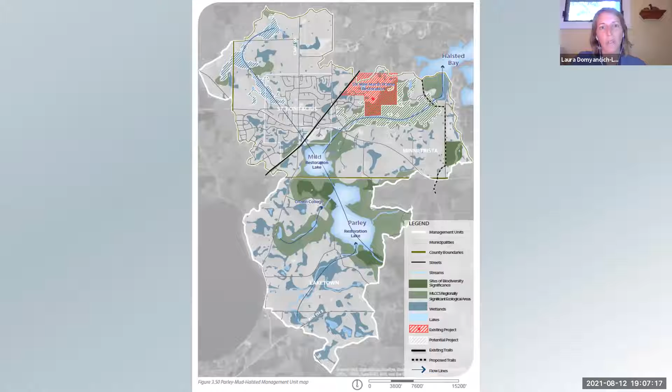This evening, I'd like to cover an overview of the project and the priorities that have been guiding design up to this point, and a summary of input that staff received from the Policy and Planning Committee meeting in January that's informed certain design decisions.

Some feedback that staff received during a community engagement event held earlier this month, and also from Minnetrista City Council when staff provided an overview of the project in August, and also what we've learned from our coordination with our project partners, how design development has progressed for both the trail and the site interpretation.

I'll also ask for the board's reaction to the design direction up to this point, and provide an expected timeline for us to reach design completion and then also for construction bidding.

Just a little bit of background on this project. The original Capital project itself dates back to 2012, when the district purchased 210 acres that were formerly 2 farmsteads. The wetlands on the site had been tiled and drained and were being farmed along with most of the uplands of the site, except for a few pockets of oak woodlands.

The intent of the original capital project was to restore the property by breaking the existing drain tile, which allowed the wetlands to expand to their historic extent. After 3 years of intensive vegetation management, including seeding and herbicide application, mowing, and prescribed burning, this led to an establishment of a really diverse native plant community that's provided both water quality improvements and habitat improvements.

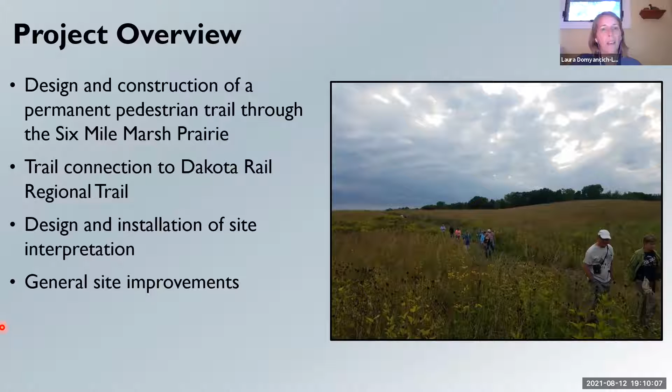Following early design guidance provided by the Policy and Planning Committee meeting in January, staff have been guiding design development under some primary considerations.

The natural character of the site, its sweeping views, the diversity in plant life, and the array of wildlife is really highly valued by the community. And these resources are sensitive to disturbance, which should indicate that we would use a light touch on the site, not only in construction activities to construct the trail, but also in the scope and scale of the project itself.

Also, through maintenance of a temporary mowed trail that's covered the western half of the site, we've seen consistent but really light usership, which indicates to staff that the design of the trail and interpretive elements should capitalize on both the regional trail users and also people who will come to see the site as a destination over time, accessing the property from Halstead Drive.

There's only about 750 people within a 15-minute walk shed of the property, but we know from Three Rivers Park District that between 350,000 and 400,000 people use the regional trail annually. So there's potential for greater visitation once people are aware of the site. Also, because the property is so unique in this rapidly developing landscape, people may begin to seek it out as a destination for birding or viewing wildlife.

In thinking about how to best interpret the site, our guiding principles have been that interpretation should create a meaningful engagement with a landscape that some people can feel overwhelmed by or unfamiliar with, while also noting the intricate, observable features within this expansive landscape. Interpretation should reflect the unique characteristics of the site, underpinned by water, matching the high design standards set at Wasserman Lake Preserve, but customized to this unique site. The scope of interpretation shouldn't overpower the beautiful rustic character of the site, but complement it and cause people to connect with it.

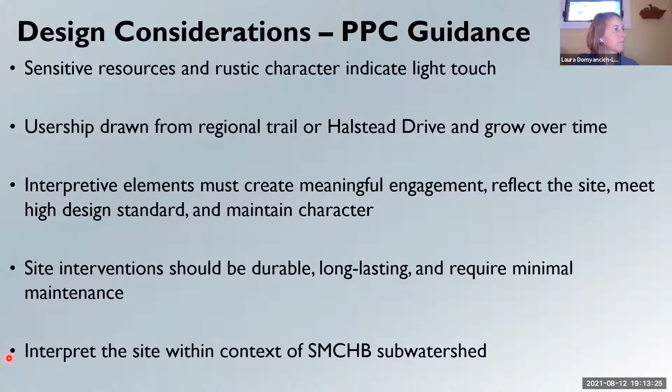Interestingly, we heard a lot of these same themes during a community engagement meeting held on July 6th. The community expressed a strong interest in design that would limit disturbance to the site during construction, and advocated for limited interventions to protect the sensitive resources on the site. The questions raised were primarily about the scope of the project and the anticipated timeline, and people were also interested in potential connections to future regional trail extensions to the east.

I will say that the goal of this project is to provide access to our site, to the prairie from the regional trail, and not really to serve as a connection to the future connections planned to the east of the site.

We also presented a design overview to the city council on August 2nd. Council expressed excitement about this new resource for their city and asked questions about possible connections to the Turtle Creek neighborhood to the south of the prairie.

Possible connections were explored when we undertook design in 2012, but those options were set aside because there is an existing sidewalk that connects to the regional trail from this neighborhood. Site topography between this neighborhood and the prairie itself is pretty dramatic, and it doesn't allow for trail alignment without significant grading.

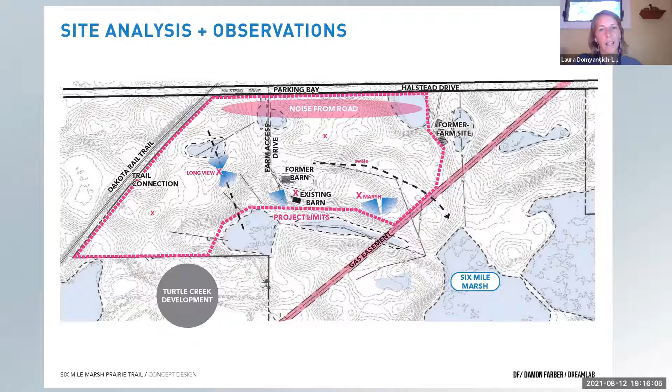Focusing that broad direction, Damon Farber has proposed a trail design that considers a meaningful experience of the site, as well as safety and long-term maintenance.

The alignment and surfacing of the trail itself promotes low-impact pedestrian use. It should encourage a slow pace through a variety of habitats within the site, follow an optimal length loop, allow for accessibility, and reduce site disturbance, providing for minimal long-term maintenance and associated costs.

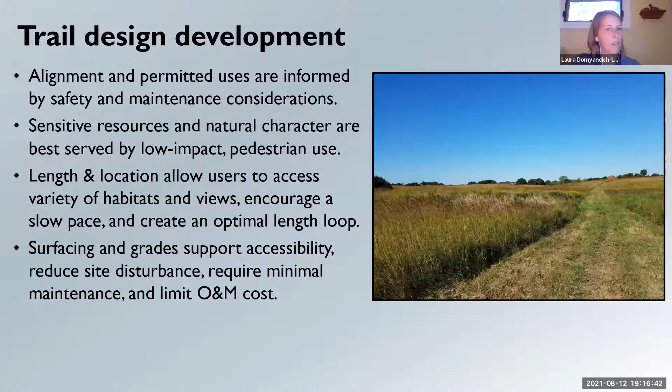So the result of incorporating all of these considerations is the trail alignment shown here in brown. The new trail will connect to the Dakota Rail Regional Trail on the western side of the site, indicated by the red circle here.

The first 25-foot section within the tree line on the Hennepin County Regional Rail Authority property will be built to typical regional trail standards, that's 10-foot width and bituminous surface. Once the trail moves into the open prairie, we'll taper it to a 6-foot width and transition to a decomposed granite aggregate surface.

As you move along the trail from west to east, you get to a high point right about here. This allows users to enter the site through this beautiful valley, and then you get the sense that you're enveloped by the prairie, with a gentle rise to this high point that allows a beautiful long view south towards 6 Mile Marsh.

Then the trail crosses the existing access road and brings users to the historic barn on the site, which is a really natural gathering space. From that point, users can either traverse the same alignment towards 6 Mile Marsh and the eastern extent of the trail alignment, looping around between these two beautiful wetlands on the site.

Then they can return back to the historic barn or follow the loop the other direction, and then either go out back towards Halstead Drive, the trailhead location and parking that's there, or continue on the existing spur trail back out to the regional trail.

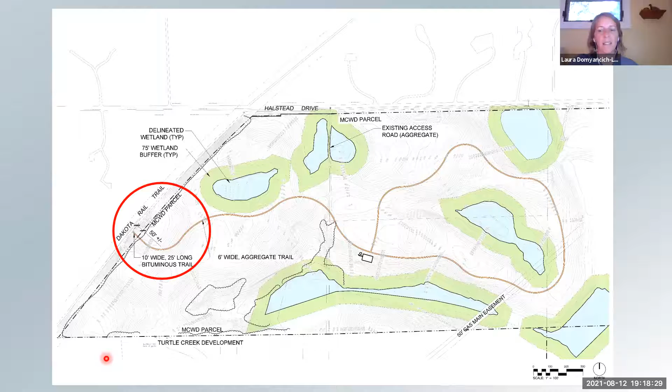Turning to the themes behind design development next, we really think that the naturalized site is beautiful on its own in its existing state, but is really defined by the space and scale of the property and that unique rustic character.

We also think that the range of stories to tell is really broad. It's had a long history, with a number of different uses over time, and there's a really cool history to tell within the site. We also think the interpretation should be consistent with the standard set at Wasserman, but also specific to this very unique site.

And then also, we want to make sure that we're finding the right balance between thoughtful interpretation without altering the natural character of the site.

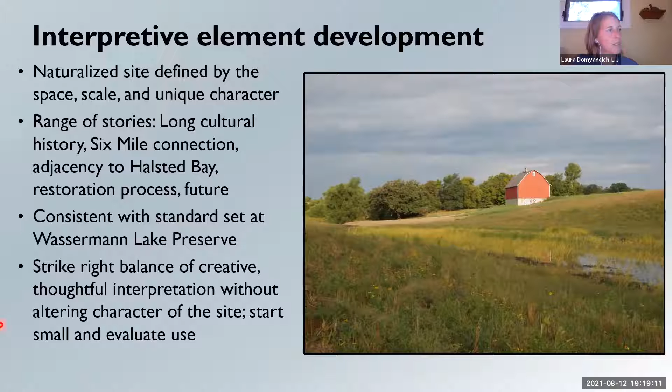Design decisions were guided by the goals of providing multiple ways of engagement, whether a user is coming to the site one time or multiple times over the course of the year, with many layers of engagement by encouraging exploration through different types of content you can experience with a casual visit or as someone more interested in learning about the site.

We're also making sure that we're creating interpretation that's relevant to the changing seasons. We expect that people will visit the site through spring, summer, fall, and then even use the site in the winter as well.

The first interpretive area along the trail will be this ecological transect at this high point of the prairie. The trail will then bring users to the barn, which will be another interpretive area. The third and final location is this long view over 6 Mile Marsh.

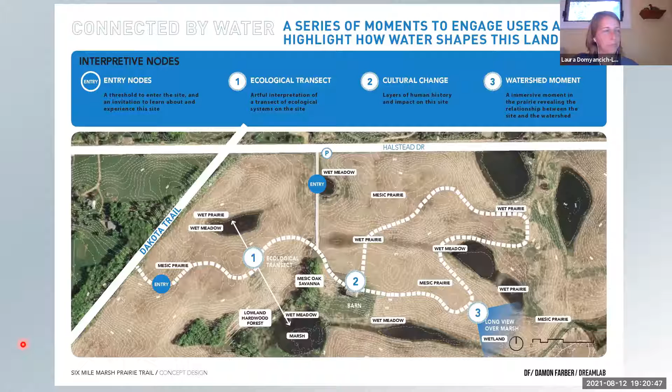The first piece I'd like to share is about the trailheads. The information shared at these trailhead locations will be primarily informational in nature - a bit about the site, that people are entering property of the watershed district, information about the restoration of the site, how it connects to the larger 6 Mile Creek Halsted Bay watershed, and a simple trail map showing people where they are and what they can expect as they experience the trail.

Those will be at both the regional trail connection point as well as Halstead Drive. Something we've been considering is that the interpretive area or trailhead location off of Halstead Drive will likely be more substantial, looking more like an entry into a site, something visible by drivers, as opposed to the trailhead at the regional trail, which will be smaller in scale and more suited to a trail user on foot or on a bike.

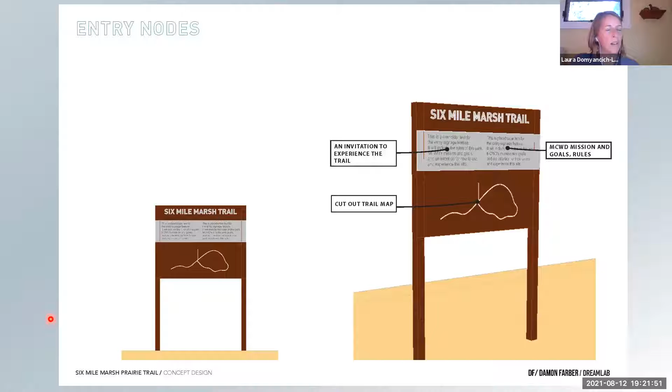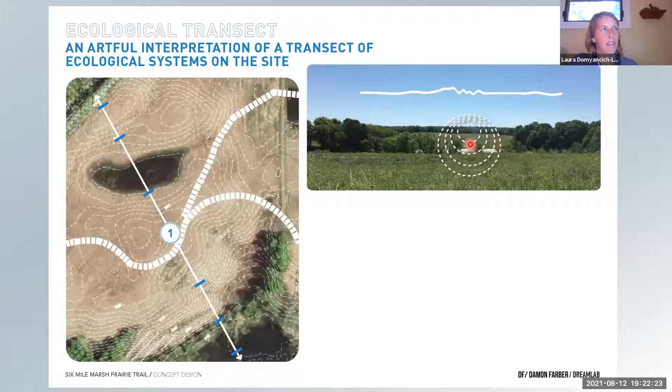As I mentioned, the first interpretive element will be this ecological transect location, at a high point on the prairie with a view over many habitats. In the foreground is the rolling prairie, then open water wetland, then an oak savanna above 6 Mile Marsh, and you can even see the water tower in the distance. The view is captured by this graphic, showing many habitats across a long view across the site.

That's the long view you get being out on the prairie. This ecological transect essentially has two portions. The first is a series of weathering steel plates inset in the ground, inviting users to walk out into the prairie and get up close and personal with the various plants and elements.

The threshold is made from plates with stainless steel behind them, with engraving or cutouts within the steel plates. That messaging will be specific to things to notice at ground level: plant and insect species, animal tracks, movement of water, that sort of thing.

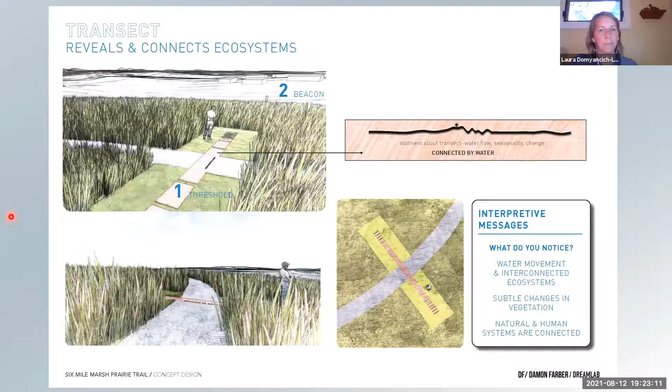As you follow that transect out into the prairie, you'll reach an upright frame that focuses your view across the landscape and indicates distance to specific features beyond—the open water wetland, additional prairie out to 6 Mile Marsh, and the water tower in the distant view.

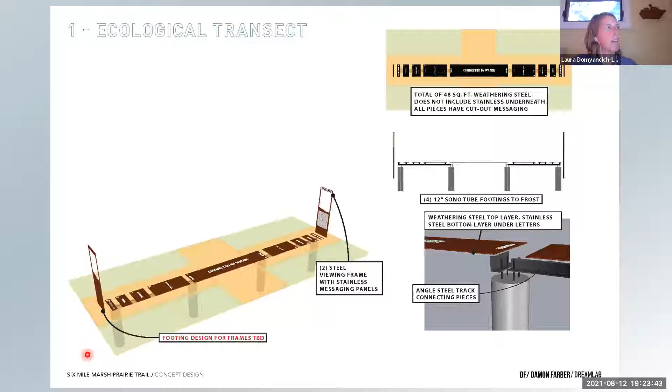The second interpretive element will be at the historic barn. This is again a natural gathering space, something we like to include in our interpretive elements. In addition to simple benches or picnic tables within the area, the barn itself will be used for interpretation of the cultural history of the site.

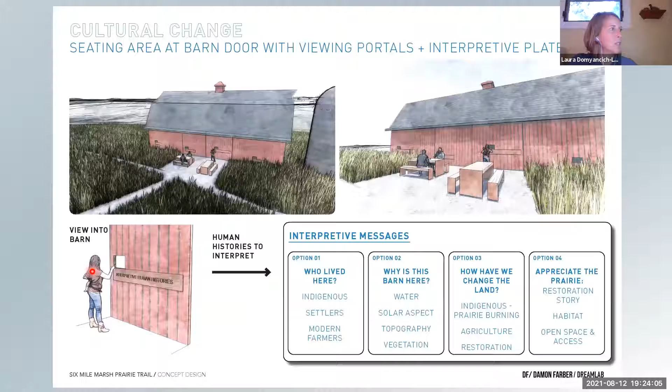The sense here is that small viewing portals will be cut into the barn structure itself. To the interior of the barn will be affixed steel frames with an acrylic insert engraved with four depictions of the cultural history of the site. The idea is that a viewer would stand outside the barn and look in to see these images within the frames.

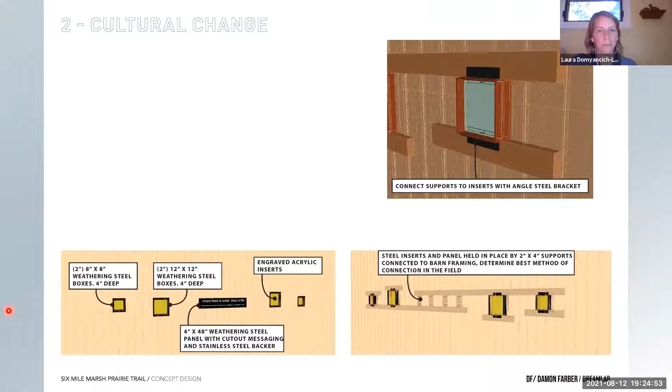The cultural history of the site will be interpreted within these four frames: first, the inhabitation by indigenous people, then the agricultural use, its current conversion to a restored landscape, and then how the site might be used or changed in the future.

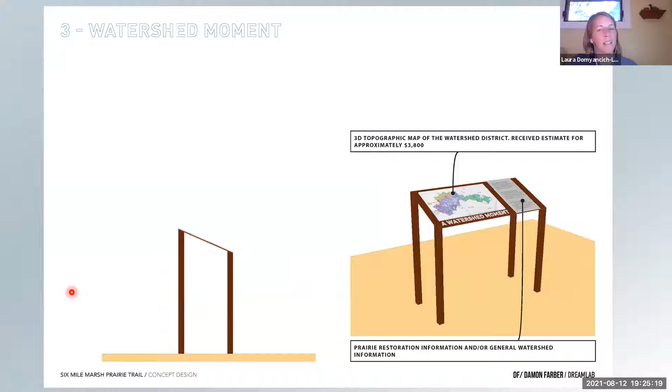As mentioned, the final interpretive node is located at the trail's easternmost point, allowing a beautiful long view over 6 Mile Marsh. This watershed moment has two parts. Trail users will first encounter a topographic relief map of the watershed with content about the restoration and its connection to the watershed as a whole, and the water quality improvements throughout the subwatershed.

The second piece of this interpretive node is what we're calling sky loungers. They allow trail users to get out to the end of the trail to pause and rest, then take a different view of the landscape in.

We're thinking these sky loungers will be at two positions: one that allows users to look out over 6 Mile Marsh, and the other slightly reclined, allowing users to view the sky and the marsh together. The idea is that people pause to contemplate the interaction of land and water.

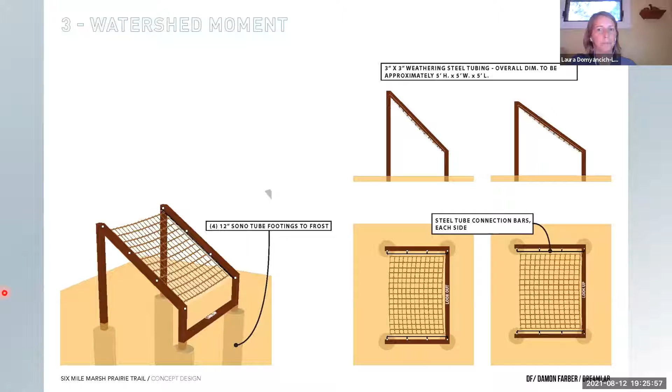I'd like to touch briefly on the material choices and the basis for those decisions. The interpretive elements will be constructed primarily of very durable materials, primarily using Cor-Ten steel and a small amount of wood for the picnic tables.

This is in consideration of the fact that the site really is remote and is managed by prescribed fire.

The pedestrian trail will be designed with input from a geotech expert, with a base section and a decomposed granite surface. Working with the existing topography to the extent possible, the trail will also include a cross slope to minimize erosion. Annual maintenance will likely include some trail edge mowing, and only in the event of a major precipitation event would repair be necessary, which would include bringing in a small amount of crushed granite and compacting it into place.

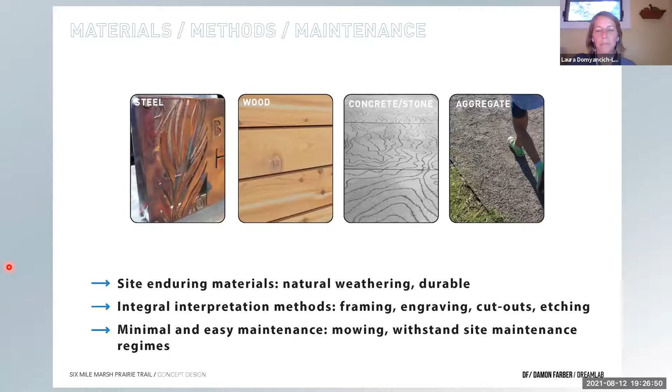With that summary of the interpretive elements, I'd certainly be happy to pause here and answer any questions related to the alignment and design.

Thank you. I've been eagerly awaiting this presentation. Will the Minnehaha Creek Watershed District logo be on the signage so people know who's sponsoring it?

That's a great question, Manager Sando. Yes, we certainly intend to include either the logo or some indication that it's the property of the Watershed District, so there is that connection.

Super. President White, and then Manager Maxwell has his hand up after you.

Manager Maxwell? Oh, will this be open to cross-country skiers during the winters?

Manager Maxwell, managers, yes. While the trail won't be maintained in the winter, we won't do grooming or that sort of thing. We'd certainly be open to people snowshoeing or doing typical cross-country skiing activities on site.

Okay, so we weren't going to groom it. That was kind of my question. If they were expected to be groomed, it wasn't going to happen.

I was just going to say quickly, we intended to follow the maintenance standards of the regional trail. That trail is not maintained in the winter either. People do snowshoe and ski on that trail, but they don't do grooming or things like that.

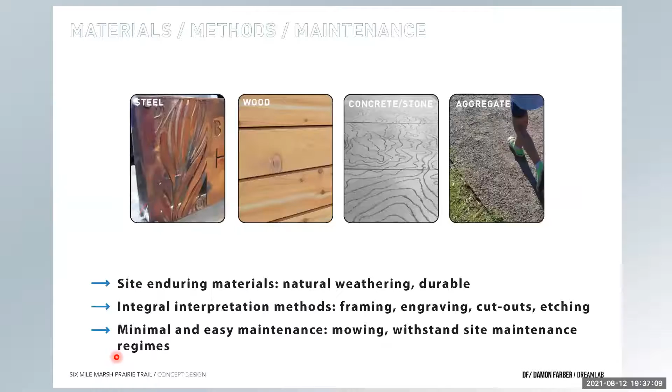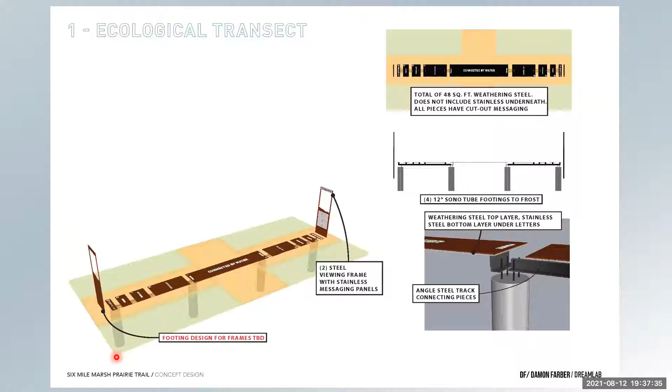Thank you. My question is on the first node, the image where the person is going either left or right at a 90-degree angle, for an alternative view from the path. I really like the barn, what we're doing there with it, and I like getting to the end of the trail and providing a view spot. I'm not sure if you could walk me through a little more thoroughly what's getting accomplished at this one, and having 3 nodes in a mile, and if that's accomplished somewhere else.

I'm just struggling with this: would somebody be walking down the trail, decide to turn to the right, and then cross again the trail and go to the left and stand there for a while?

Can you walk me through that experience or what we're accomplishing at that first node, please? Certainly, Manager Loftus. The idea here is that the trail does traverse the prairie, but there will be a little bit of a shoulder on the trail, and its width is broad, so you don't really feel kind of enclosed by the prairie.

The idea with this transect is that you're kind of walking out into the prairie, which can in some cases be sort of over your head. Another thing to consider is that people can feel very overwhelmed by the prairie. It's this expansive landscape. It feels very wide open.

The idea with having your feet be focused, or your view to be focused at your feet, is that you're noticing things at ground level. The inscriptions on these weathering plates will encourage you to look at a plant species that's right there, or an insect species or an animal track that you might see. So it gives you a focus at ground level rather than taking in the entire prairie.

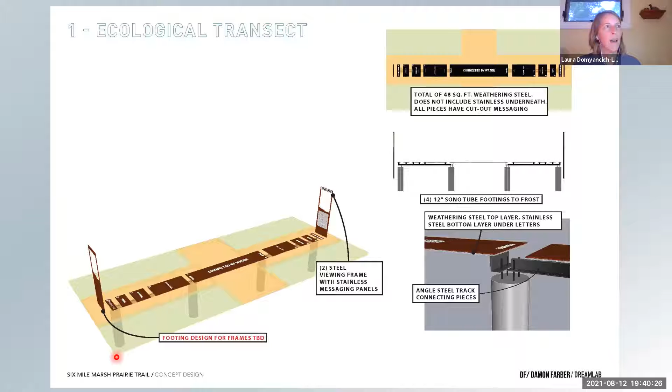Is it identical both directions then? That's a good question. My sense is that it should not be. One view shows you the items I mentioned. If you turn and look the other direction, you're seeing an open water wetland behind you, the regional trail beyond that. So my sense is that content will be different as you turn the other direction because the views are different. What you might see in that direction is different. That content is still conceptual at this point and something we're kind of working through.

But the intent is going to be identical both directions? Yes, the intent is identical. The actual structures are identical. Okay, I guess that one's not my favorite, but I really like the other two.

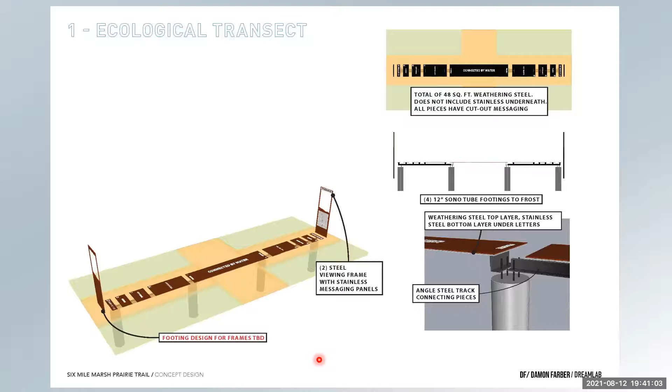Other comments and questions at this pause point, either building off Manager Loftus's thread or something different?

Well, maybe just for Jessica, then what would you like if you didn't like those? What else could you do? I don't know. I think my question would be, it's a 1 mile loop. You're probably fine with 2 nodes. I don't know.

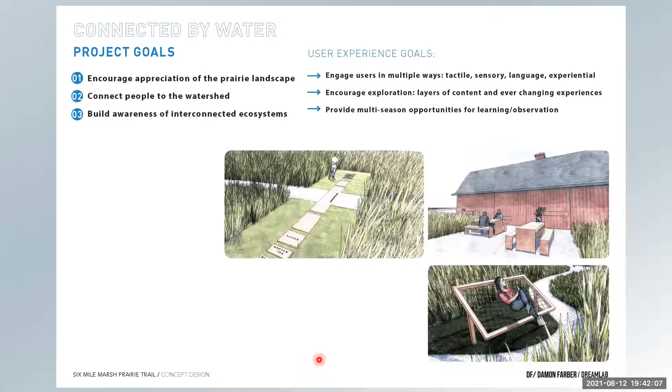It seems like maybe it's a little bit of a stretch. I don't know that you have to come up with something. It can be just beautiful in nature, and people are out on the trail in a rural area to begin with. I don't know that they're expecting intense interpretation on a 1 mile loop, but I don't know if there's a strong need for something right there. It's not that I don't welcome it, that one just doesn't speak to me as much. That's all. So maybe have the landscaper look at it again, just to see if there are different alternatives to come up with.

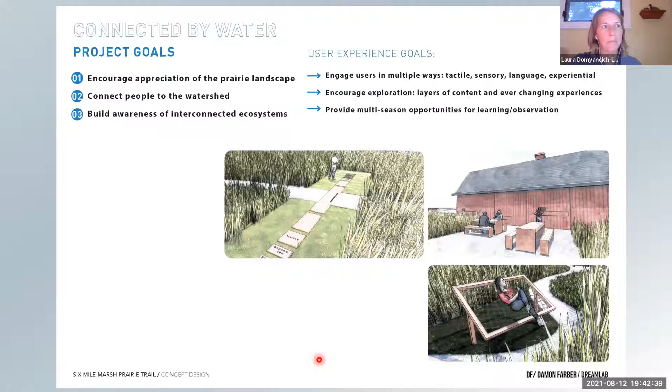Manager Maxwell, Manager Loftus, yeah certainly. We're at about 60% design currently. We received our 60% design plans last Thursday and have been reviewing them, and there's still definitely opportunities for adjusting things. We're not locked into anything at this point, and that can certainly be informed by this discussion and staff's impressions of these items as well. Nothing is set in stone at this point. Certainly the opportunity is to adjust things as needed.

Then I think it would make sense to have the landscaper look at it again and say, if you had some different thoughts between then and now, what would you change on it?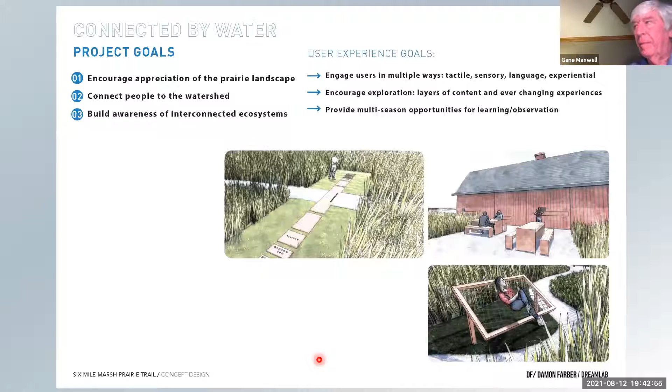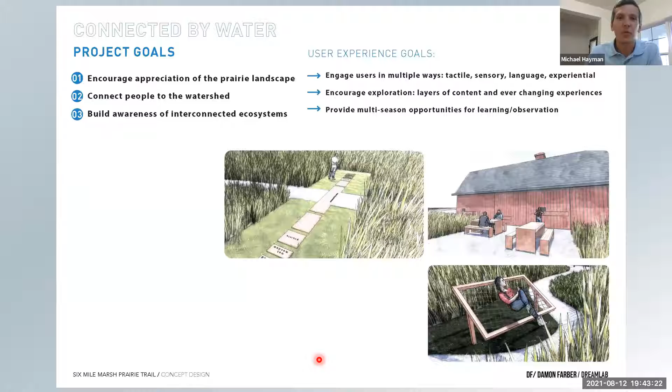I think that's a great point, and we can speak with Damon Farber in more detail on that. The one thing that's really hard to communicate in a 2D presentation, and why they selected this particular location, is because it's the most compelling view on the entire prairie. It is the highest point of the prairie, and when you look out over the 200 acres the district owns, this is one of the few nodes where you can actually see across the entire transect of the property.

So they're trying to bring together not only the transect and how water connects all those biomes, but also the scale of the prairie, the wetland, and the distance between things that are actually very difficult to see with your eye. You don't understand the actual distance to the water tower, to that large bur oak, to that wetland, the broken drain tile. They were trying to bring some texture to that and help a user out on the site, where you finally get this vast view shed after coming off the Dakota Rail Regional Trail, to understand the area you're looking over, how far you're actually seeing, and how these things are all connected by water. So basically, it's to have someone look at it and say, wow, this is amazing how much it covers and how vast everything is.

Okay, that's right. In addition, I like your point, Michael. Sorry, Sherry. That's okay, I was just going to say, I appreciate that point. It made me wonder though, are we sure that view isn't going to change with some beautiful housing development addition in the future?

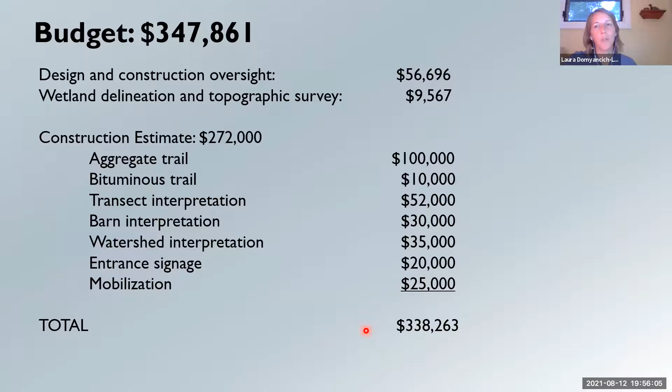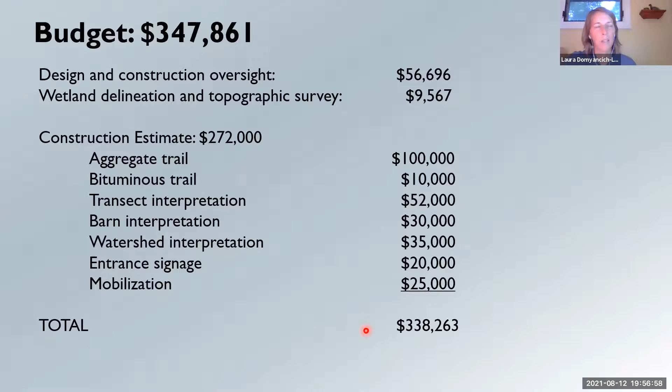Unfortunately, the estimator was not able to develop those today. But we anticipate the costs will come in right around this range, in which case we may have to reduce the number of interpretive elements or the scale of interpretive elements. Another option would be to shorten the trail length or maybe phase in some of the interpretation. But knowing that we are nearing our construction budget, we just want to make sure we're dialing in costs as closely as possible before we go out to bid.

And with that, I just want to share a little bit about the timeline that we're looking at. We expect to wrap up design by the end of the month and also be completing our regulatory and coordinating agency approvals. And then on the September 23rd board meeting, we'll be seeking approval of the 90% plans and also getting authorization to solicit bids at that time.

To hopefully solicit a good bid price, we're offering the option of either fall 2021 or spring 2022 construction. We feel as if contractors are offered the opportunity to either phase construction, maybe do preparation for the trail, do the base material of the trail this winter, and then complete the remainder of the trail surfacing and installation of the interpretive elements in the spring, or just move construction to spring entirely. It might get better bid prices. So we're offering that option with the bid. And then looking at either construction this fall or in the spring, and then have the trail be opened with a ribbon cutting in May or June of next year.

And if there are any final questions, I'm happy to take them. But again, I'm very grateful for all the input and how you've helped us focus our next steps in this process.

I kind of like the approach about winter bidding and spring start. You're going to come up with some better bids, I think, too. Because right now everybody seems to be fairly busy, so that you're going to get a better price when they're over the winter. They're a little hungry for jobs, and you got to line up jobs. So I think that'll be a better time. I kind of like that approach better.

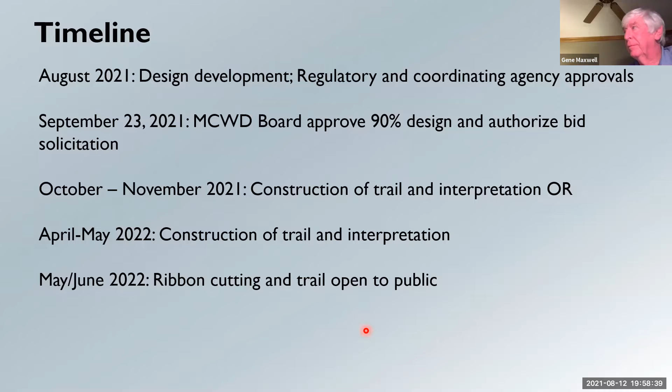Manager Maxwell, managers, yes. Our design consultant has indicated that this might be a really good filler project coming in at the tail end of the heavy construction season. This construction window would probably be 6 to 8 weeks, so it might be something nice to wrap up their construction season with.